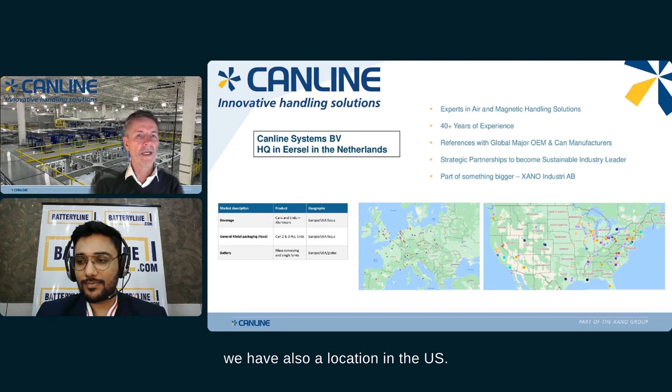Thank you, Mr. Vikram Paul, for giving me this opportunity. As you mentioned, I'm working for the company Canline, based with headquarters in the Netherlands, and we also have a location in the US. I'm responsible for project management, so I'm involved in the execution of the projects, including the installation at our customer sites worldwide. Next to the execution, I'm also involved in opportunities for the battery market. If you're looking at these slides, you see we are experts in air and magnetic handling solutions.

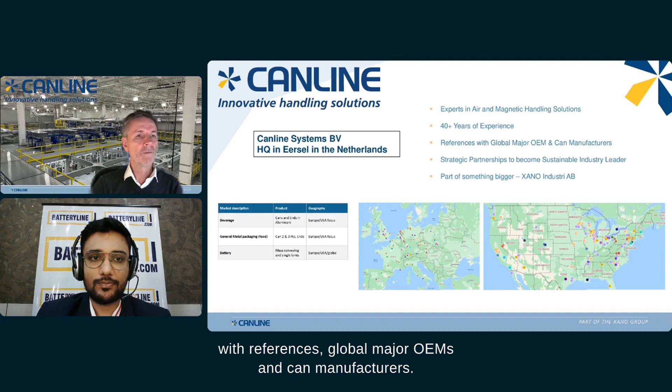We have already more than 40 years of experience with references from global major OEMs and can manufacturers. We have strategic partnerships to become a sustainable industrial leader. And it's Canline, but we are part of something bigger - we are part of the Xano group.

If you're looking at our installed base, you can see it's two areas where we are really based - we have an installed base in Europe, and we have an installed base in the US. We have installed base in other parts of the world too, but this is our main focus. So in Europe and the US, every dot represents equipment at our main customers.

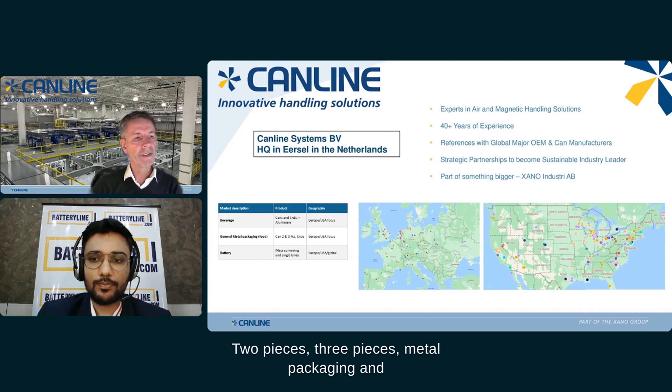And if you're looking at our product portfolio, we are aiming for the beverage market, for the can and the lids. And we are aiming for the food market - 2 pieces, 3 pieces, metal packaging. Beside that, the food and beverage, we are also looking into the battery market.

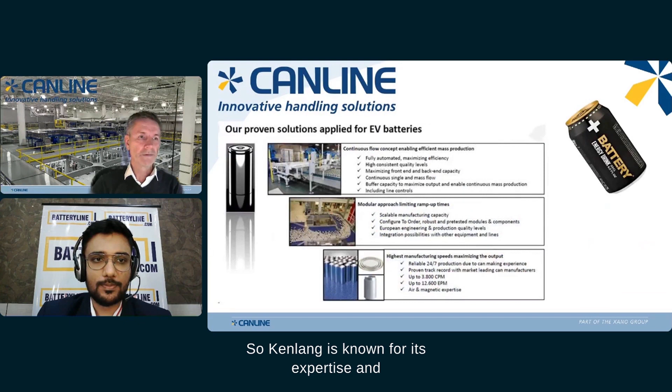So Canline is known for its expertise in handling solutions for rigid metal packaging for the food and beverage market. We have an installed base worldwide. And if you're looking at batteries, it looks a little bit different than the food and beverage markets. But if you're looking at this picture on the right side, you see a can with a logo from the battery - so with some creative ideas, you can also see a battery in the can. So it looks like a different market, but it's not. I will explain that a little bit further during this webinar.

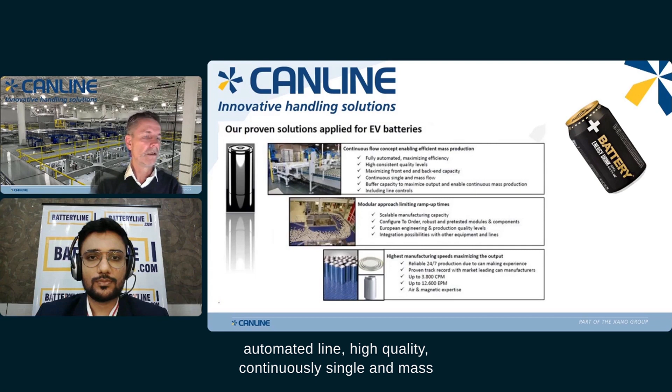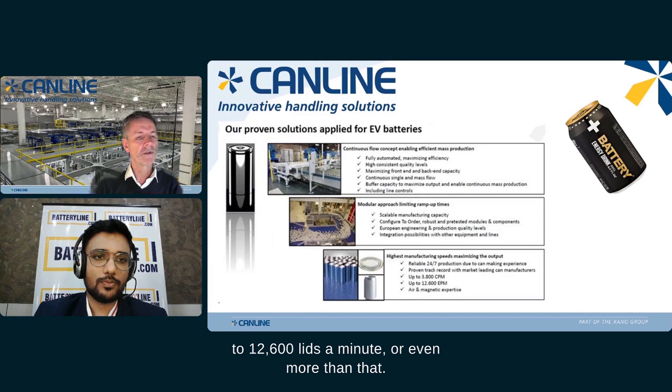Some proven applications we have already in EV batteries: fully automated lines, high quality, continuously single and mass flow, buffer capacity to maximize outputs. We have a modular approach, limiting ramp-up times. High manufacturing speeds we have, maximizing the output. If you're looking at cans, we can do up to 3,800 cans a minute. And if you're looking at the ends or the lids, up to 12,600 lids a minute or even more than that. Of course, we transport those products with our air and magnetic expertise.

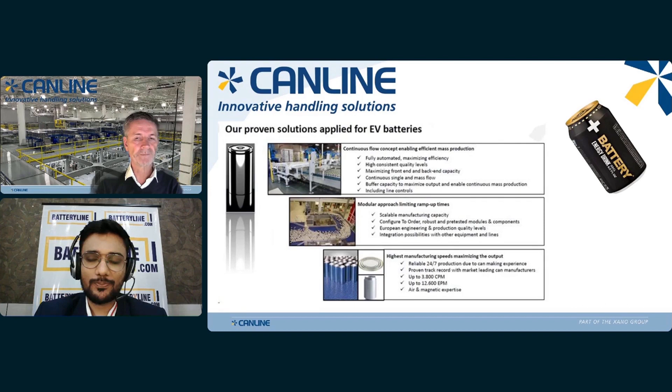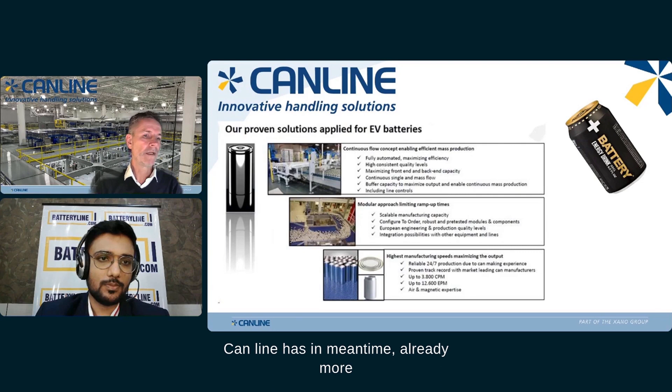So our mission from Canline is to be the world leading specialist in rigid metal packaging conveying equipment and the most sustainable partner of choice by offering superior technical solutions. We do this through handling solutions in the food, as explained, beverage, but also the battery industry. What we're doing is connecting the machines. Canline has more than 40 years of experience in belt, air and magnetic handling solutions with references at all global OEMs and can manufacturers. We are headquartered, as explained, in the Netherlands, in Eersel, and from there we supply machines worldwide, mainly focusing on the US and Europe.

Thank you very much, Rene, for the introduction of Canline. Coming to the first question of the Q&A session: what are battery cans, and how does battery can manufacturing look like from start to finish?

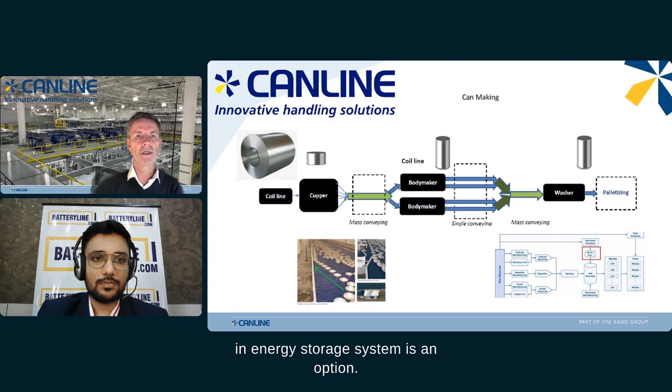Yeah, there are several battery types. Looking at the EV industry, we're looking at that of course, but also energy storage systems is an option. In general, there are three types of battery: pouch, prismatic, and cylindrical cells. These cells are combined in battery packs and used in storage and in cars.

The focus of Canline will be the cylindrical cells. Handling this is quite similar to that of cans in the food and beverage industry. So if you're looking at this slide, you can see we can use our existing technology in the area of can production for the battery.

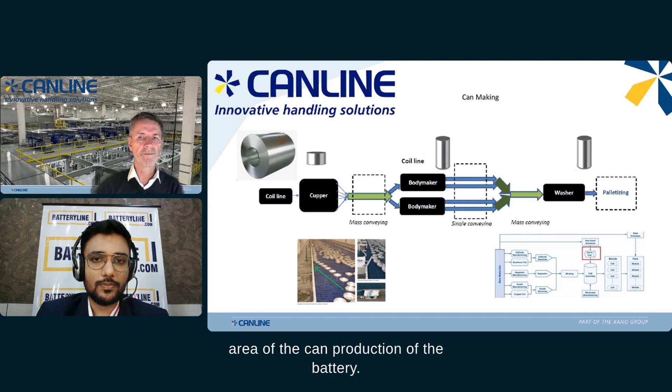Starting from a coil with the steel material, we make the cup, and then with mass flow we go to the body makers creating the can. From that part, with single conveying again to mass conveying, we go to the washer, and from there you can go to the washer or the next step in the palletizing process.

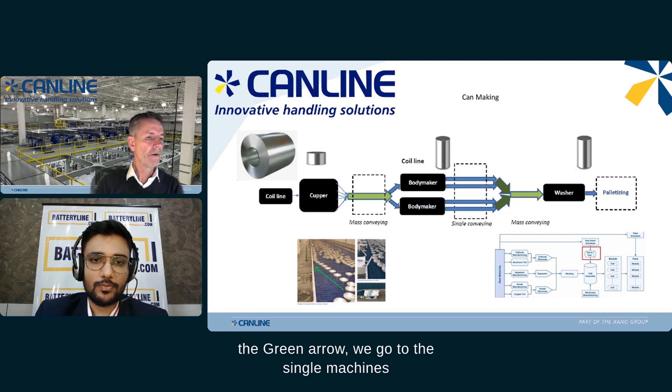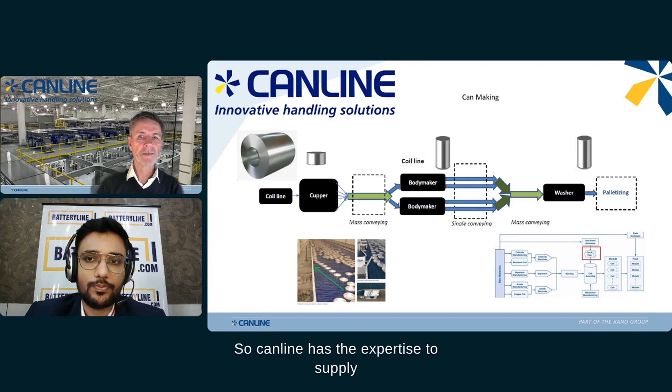Looking at the picture below on the left side, you can see the mass flow production, for example from the cup. You can see with the green arrow we go to the single machines by using our magnetism in the belt. So for mass flow, you go to single lines. Canline has the expertise to supply those conveyors between the cupper and the body maker and then towards the washer. Transport from there on will depend on the building, but can also be done with conveyors, elevators, etc.

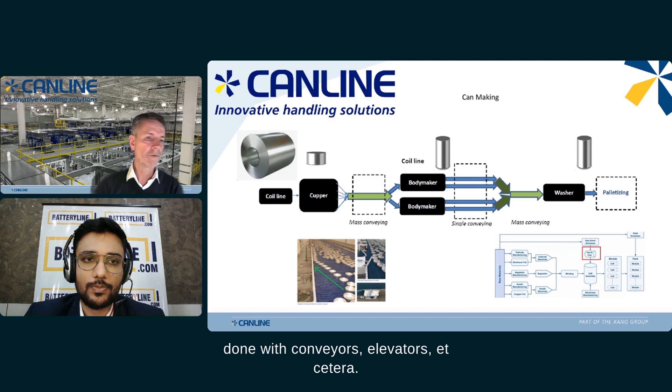So in this part of the process, we see our large 40 years of experience come into place - from coil until the can making.

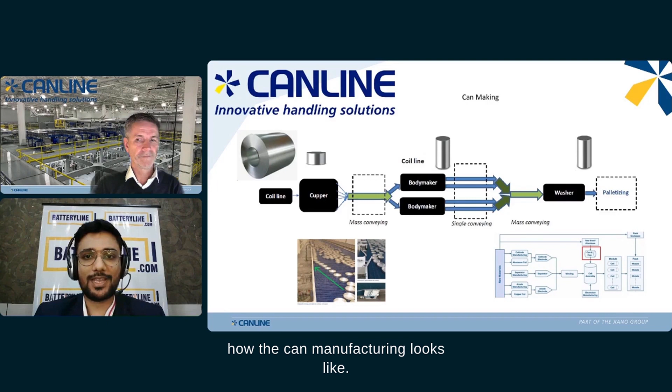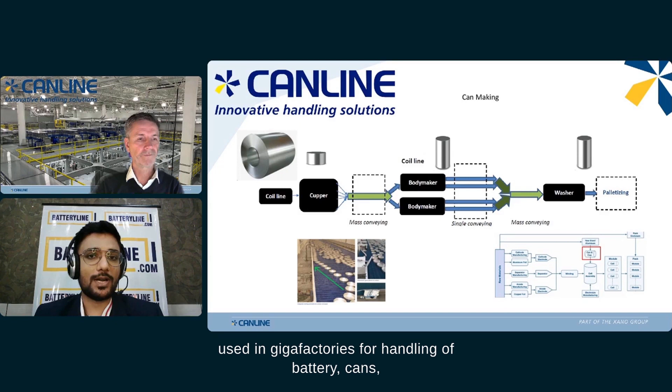Thank you very much, Rene, for explaining how the can manufacturing looks like. So coming to the second question: can you explain the different types of conveyors commonly used in Giga factories for handling of battery cans or cells, and their respective advantages and disadvantages?

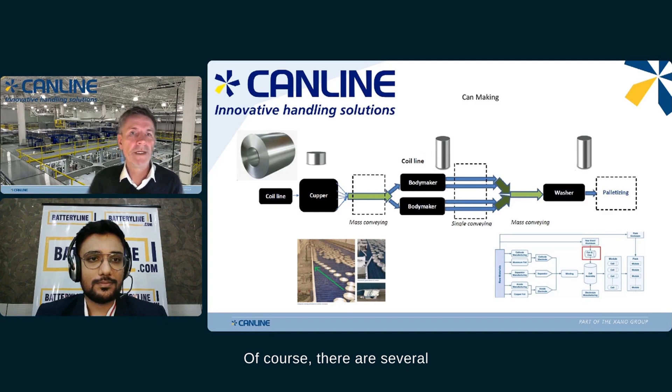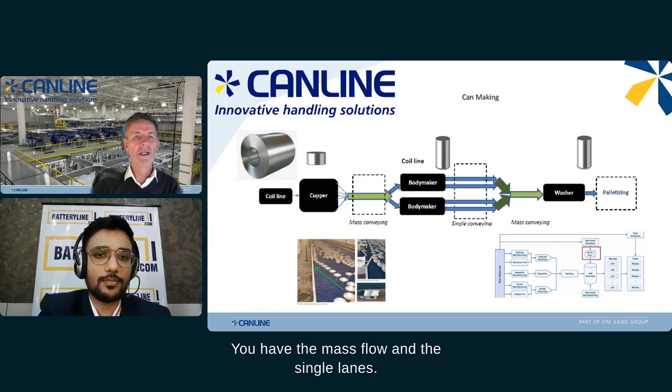Yes, I can explain a bit. There are several solutions to connect the machines. If you're looking still at this flowchart, you can see two different types of belts: the mass flow and the single lanes. In both mass flow and single lanes, we use our magnet solution, and since the cans from the battery are made of steel, we can use our expertise in magnets for that.

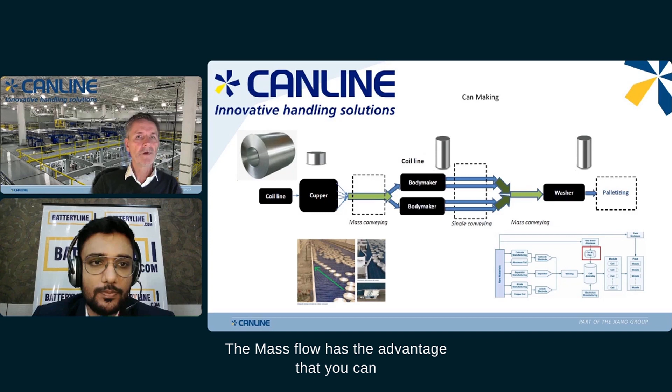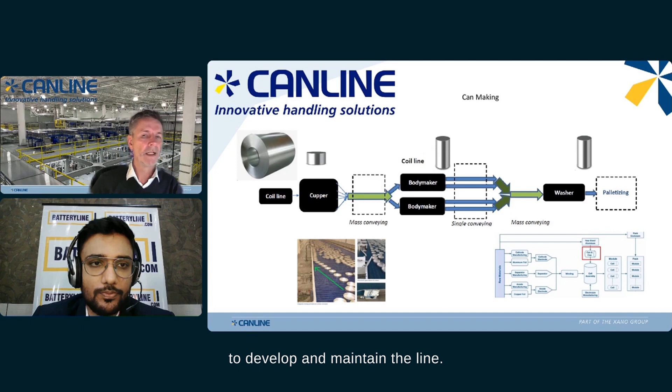The mass flow has the advantage that you can transport the cans in mass and with single lanes feed them into the machines making the battery. This makes the controls easier to develop and maintain the line. Based on our history and experience in conveying, Canline uses permanent magnets in the system.

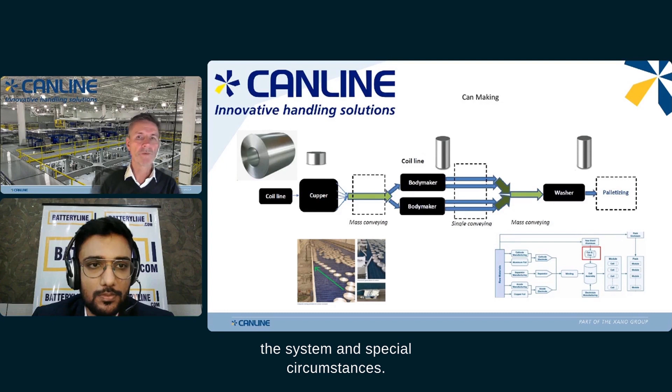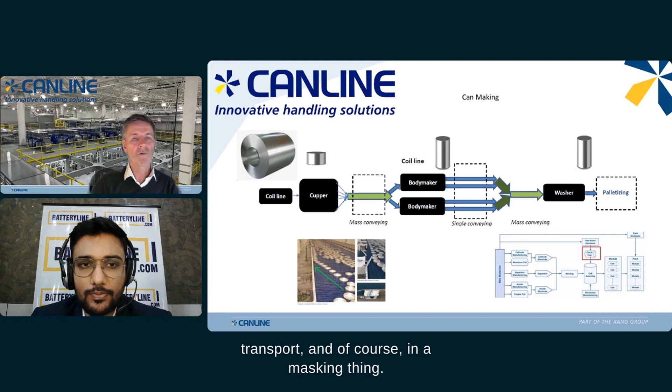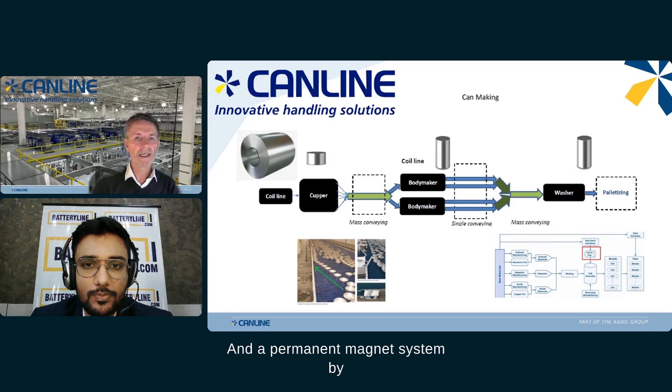In special circumstances, we can use both types of magnets, the permanent ones and electrical ones. We can use them in elevators, lowerators, overhead transport, and of course in mass conveying. It will guarantee production requirements across a wide range of products, from low to high speed. A permanent magnet system by Canline is very cost efficient because the correct magnet strength can be chosen.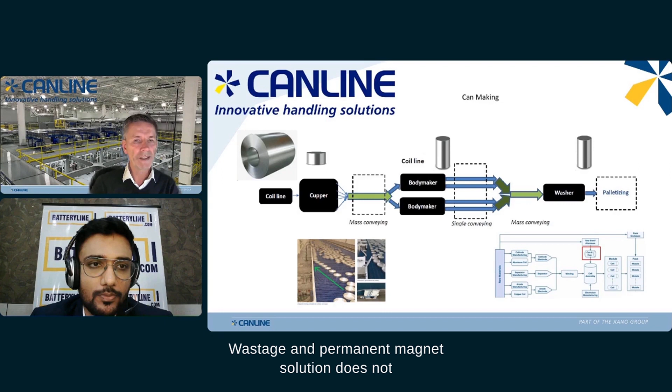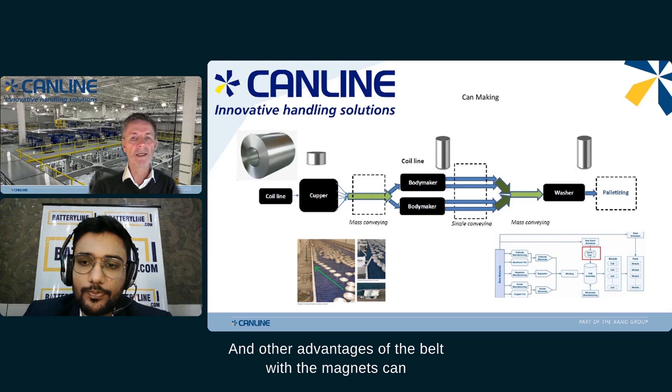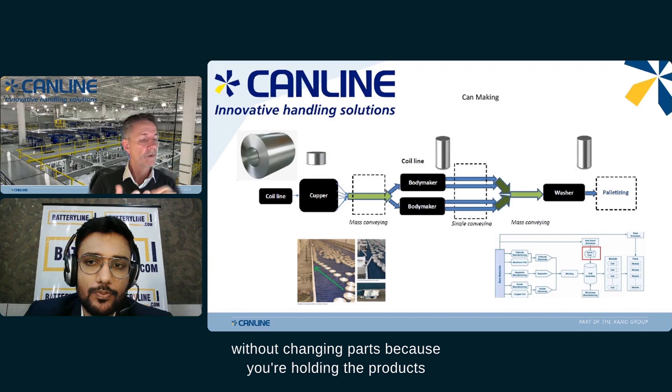It's not causing unnecessary wear or power wastage, and the permanent magnet solution does not consume electricity or need any maintenance. Other advantages of the belt with magnets are that side guides are not always needed, so you can skip that for preventing damage to the product, and changing to another format can be done without changing parts because you're holding the products with the magnets in the belt.

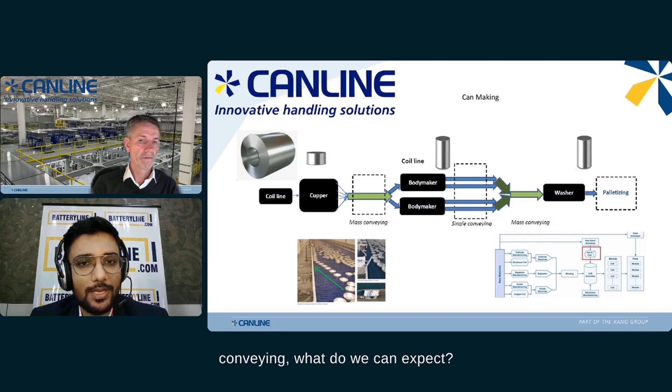Rene, when it comes to mass conveying, what can we expect? How many cans are running on the belt per minute?

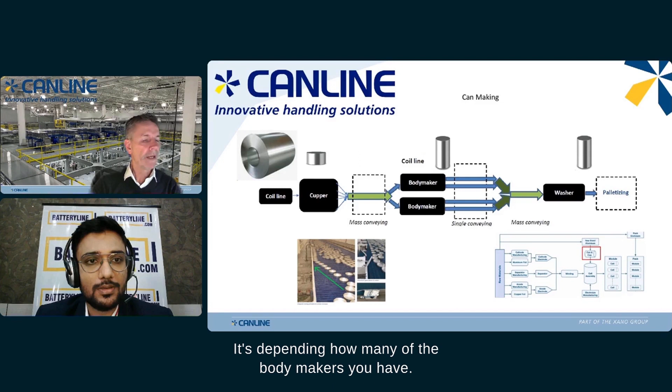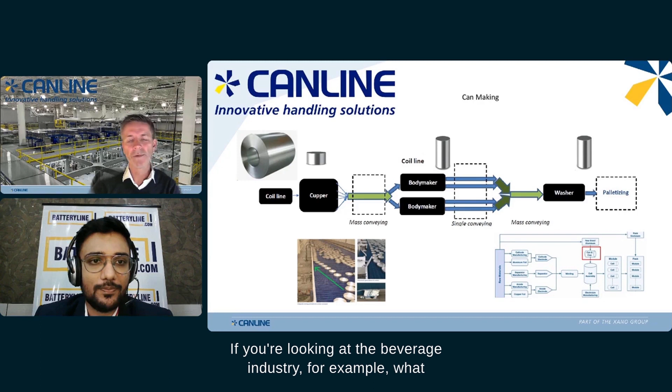It's depending on how many body makers you have, but you can imagine if in the slide you see 2 body makers, it can be up to 4, 5, 6 body makers, and each body maker can make about 200 to 250 cans a minute. So you can imagine the mass flow, what is it, 1,000 cans a minute is easily achieved. And if you're looking at the beverage industry, for example what I said before in the webinar, it could be even going up to more than 3,000 cans a minute.

Coming to the next question: what are the key challenges that battery can manufacturers face when it comes to battery can handling, and how can they overcome these challenges?

Well, the demand for batteries is growing very fast, and the factories are putting a lot of effort to keep up with this demand. Looking at the growth in the battery market, double digit growth is not strange, and you're looking to still grow until 2030 for sure.

The battery market is growing more than double digit every year. So you see factories with 100 gigawatt hour capacity, large factories making an enormous amount of batteries. Beside the challenge of material availability to produce the batteries, the handling and transport to the factories will also be a challenge. Uptime and availability of the equipment must be on a high level.

In the beverage market, more than 3,000 cans a minute are coming. If you look at the lids or the ends of the cans, it can go up to 60,000 lids a minute. So automation is part of this success, as well as balancing the capacity between the different steps in the process. Mass conveying, single lanes and accumulation conveyors are crucial to get an overall good line efficiency.

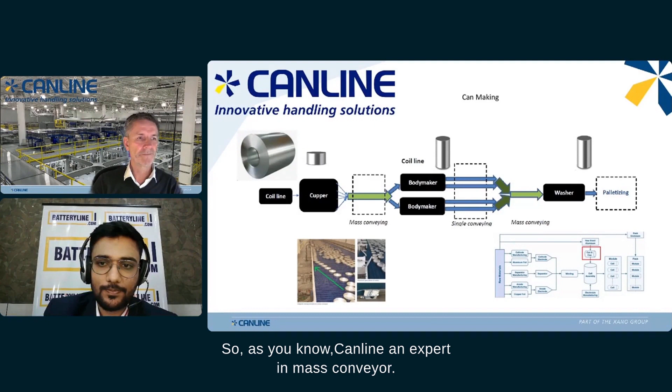I think I prepared a small slide for you, Mr. Vikram. As you know, Canline is an expert in mass conveyor, meaning a wide conveyor, maybe 1 to 3 feet or even a little bit larger, transporting cans with or without a product carrier. From the mass conveyor, we can divert into single lanes, feeding into the machines in different processes.

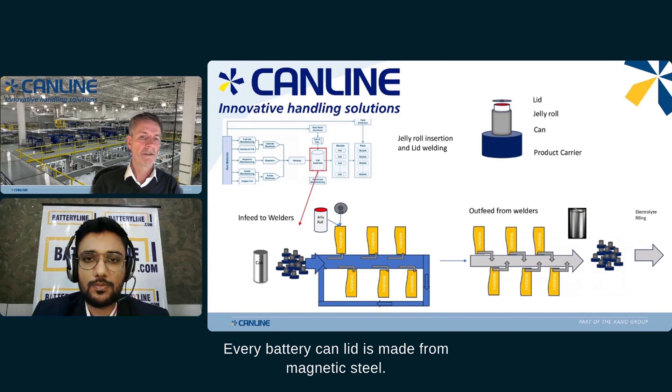Every battery can or lid is made from magnetic steel, and with magnets you can handle these easily. So using the mass flow, you can have a smaller footprint. You would do this with single lanes, all feeding to one single machine. It gives more flexibility, and it gives you more output.

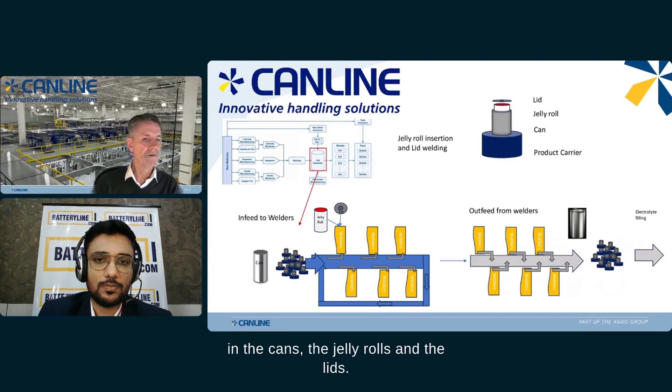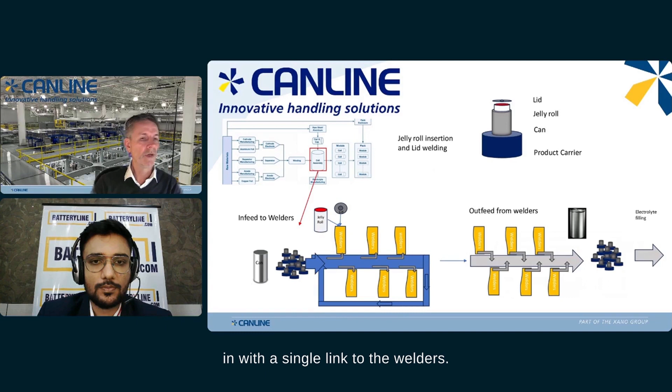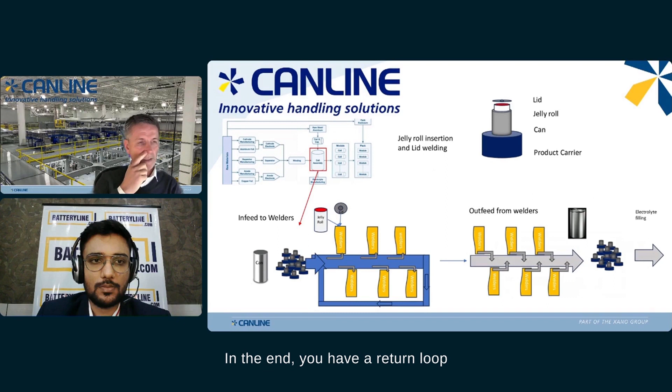In this picture, for example, if one of the welders is not running, you go to the left picture where you feed in the cans, the jelly rolls and the lids. You feed them in with the mass flow, and it will be guided to the sides, feeding in with a single lane to the welders. Mass flow going into different welders. If one of the welders for a reason is not working, it will go to the next one, and the next one. In the end, you have a return loop, feeding back the cans into the system.

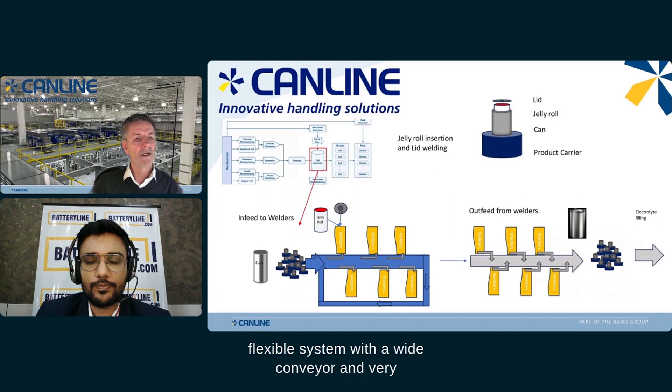So with this one, you have a very flexible system with a wide conveyor and very flexible routing for where the cans should go.

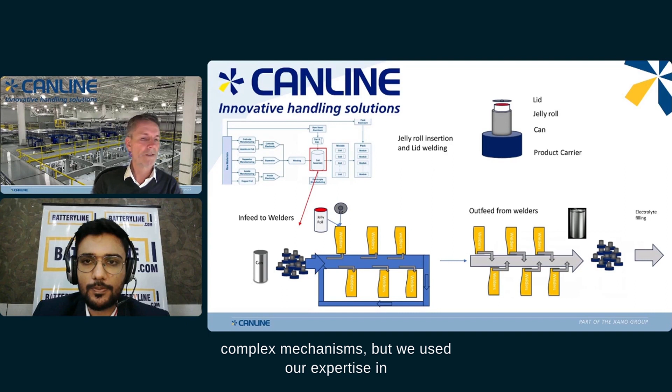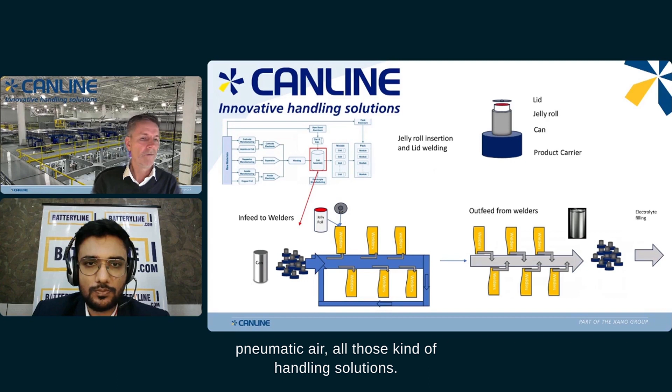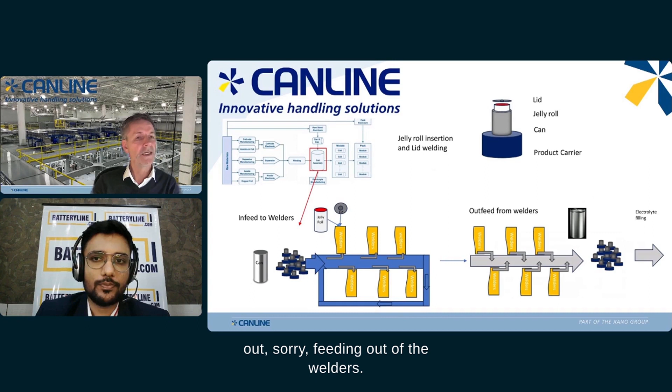So if one of the welders is not working, you can go to the next one automatically, and we don't need all kinds of difficult, complex mechanisms. We use our expertise in magnets for this mass conveying, with a limited amount of sensors, limited amount of pneumatic air, and those kinds of handling solutions. That's really our strength in this kind of concept. The feeding out of the magnets, feeding out of the welders, is fed back into the system, also on mass flow, going to the next step, the electrolyte filling.

Thank you, Rene, for explaining where Canline today provides its conveying solutions in cell manufacturing. But we would like to know more about product carriers and why there is a need for product carriers in battery cell manufacturing and conveying lines. Can you please explain more about that?

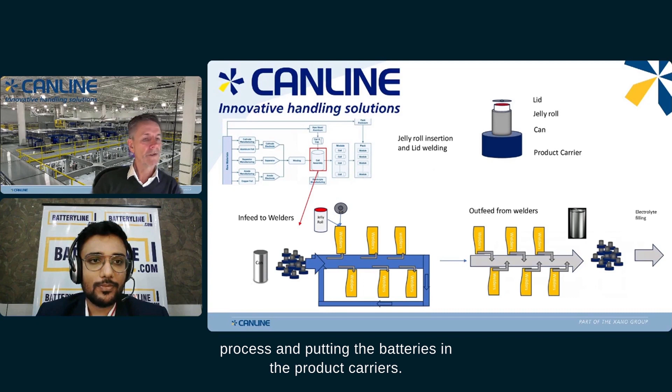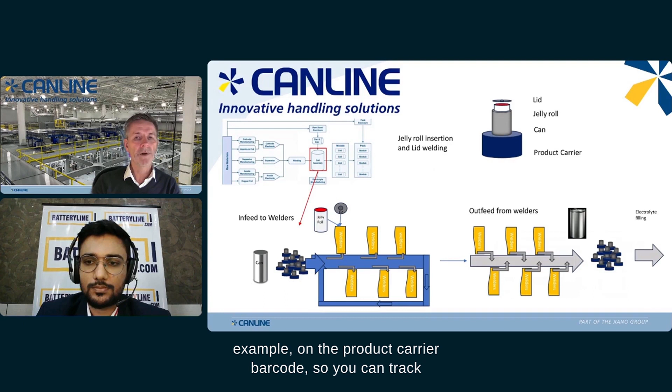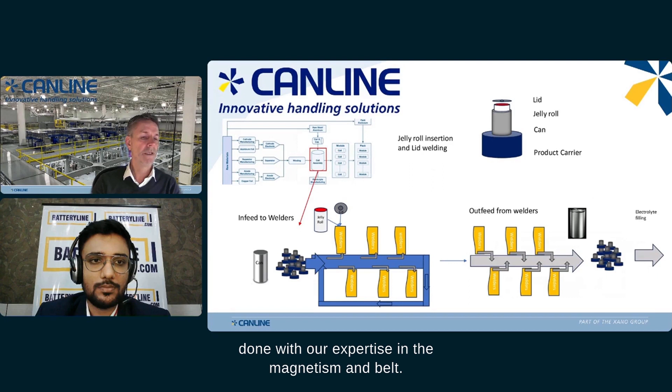Each machine, of course, has a different step in the process. Putting the batteries in the product carriers lets you transport them easily from one machine to the other with the same interface, so the interface in the machines can all be more or less the same. Also for track and tracing, you can put a barcode on the product carrier so you can track it through the whole process. The carriers are made from plastic and steel, so the handling can also be done with our expertise in magnetism and belts. The concept is the same.

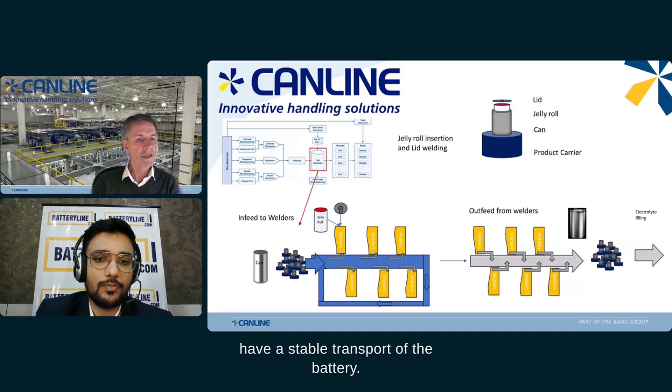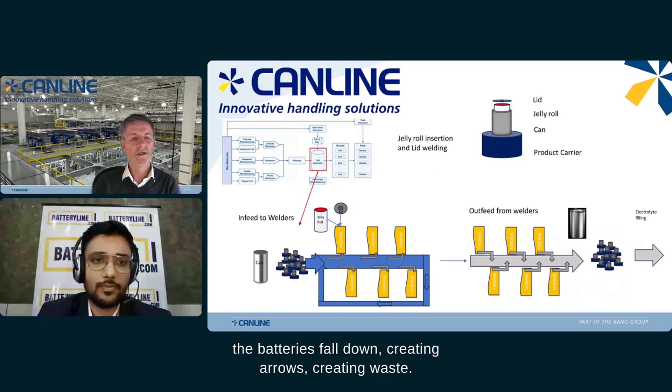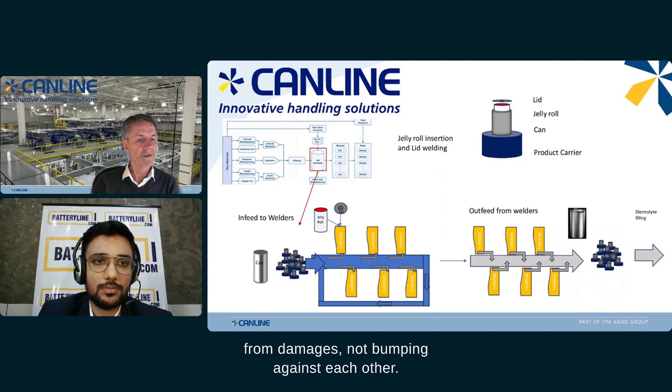Besides that, if you put the jelly roll or the lid into the battery, you want a stable transport of the battery, and you use the product carriers for that too. You don't want batteries falling down anywhere in the system, creating errors and waste. So the product carriers make the transport stable, have a good interface with the machine, and also protect the battery from damage by not letting them bump against each other. It keeps them separated.

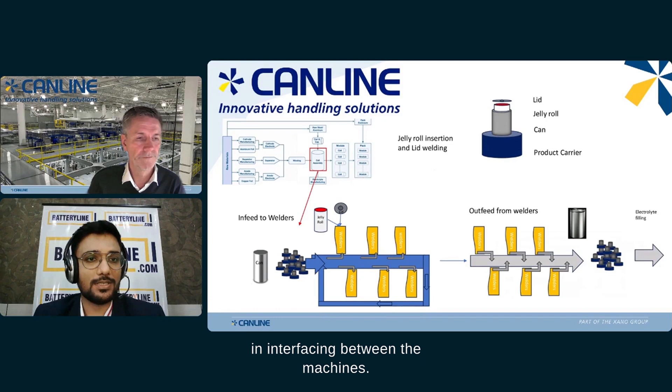Rene, you said that it helps in interfacing between the machines. Can you explain what is the meaning of interface?

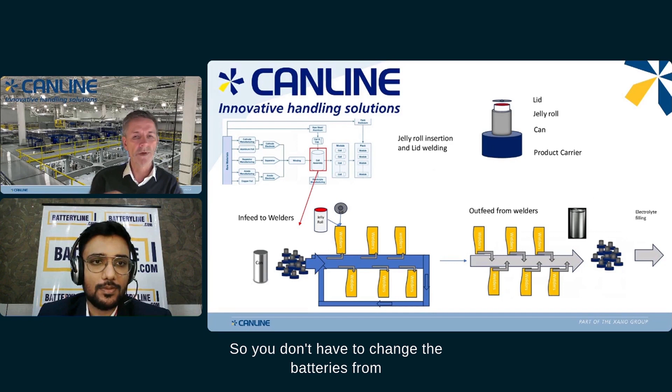Well, it's about how to handle the product carrier. You have to feed it into a machine, you have to grab it, for example, to move it to the next step in the process. So the interface always looks the same - it's always the same kind of product carrier, so you don't have to change the batteries from one product carrier to another type. That makes it simpler. If you can hold the product carrier as long as possible, you have the same interface with the machine throughout.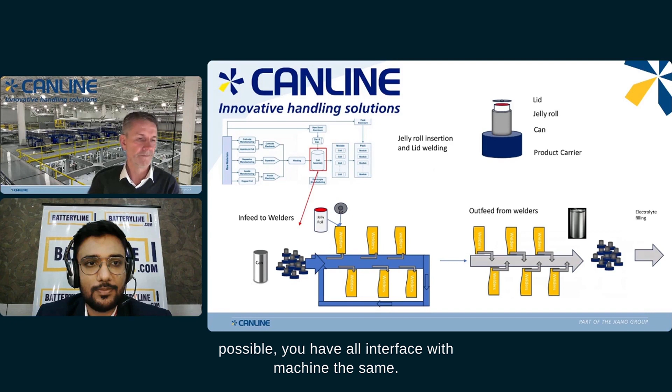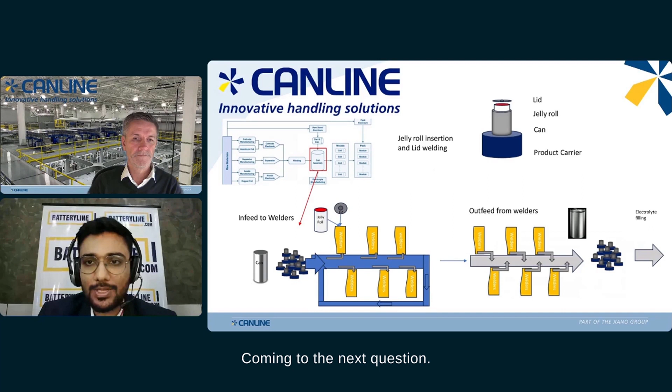Thank you, Rene, for explaining in detail how the product carrier helps in conveying of cells. Coming to the next question, how does predictive maintenance and data analytics play a role in ensuring the reliability and uptime of battery cell or can conveying equipment in a Giga Factory?

As I mentioned before, uptime is very important in Giga Factories. So we are developing that part, and we have great ideas and opportunities for this, for all production lines, but specifically also for battery lines. We don't want to produce any waste and don't want any downtime - downtime and waste cost a fortune. And yes, dashboards we already have, so you can see how the line is running now or in the past.

We are developing a system, let's call it CAS AI, artificial intelligence, to predict what's going to happen and what can be done to prevent unplanned downtime. Of course, for that, data needs to be available, but it's also a learning process. The first step is to collect the data and make it visible on a dashboard. The next step is to find the correlation between the data and determine root causes of faults, making sure it won't happen again.

The ultimate step is to predict what's most likely going to happen, to be one step ahead. This will all support the maximum efficiency of the line, the OEE, including a constant aligning between data collection and operability, and of course the ultimate goal of a self-supporting system in the future.

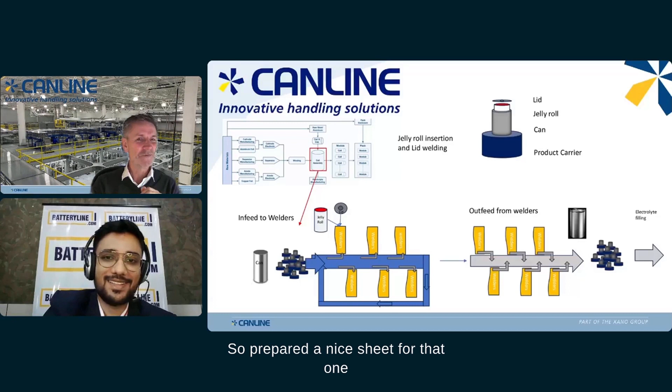So, being the Dutch guy, I compare it with the Dutch Formula 1 driver Max Verstappen. I've prepared a nice sheet to explain it a little bit further.

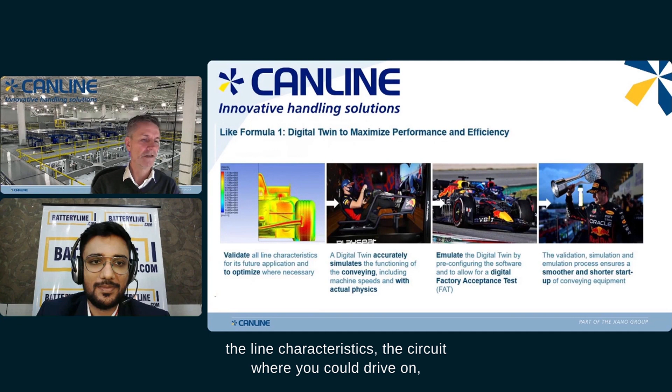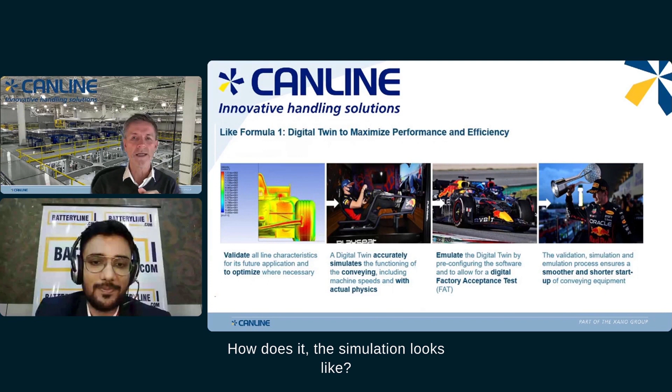If you look at the four pictures, this is what I explained about what you can do with the line to be installed at the customer. First, you validate the line characteristics, the circuit where you could drive on, how the temperature and everything looks. Then you simulate things, see how it looks in the simulation, and try to optimize the data and the settings.

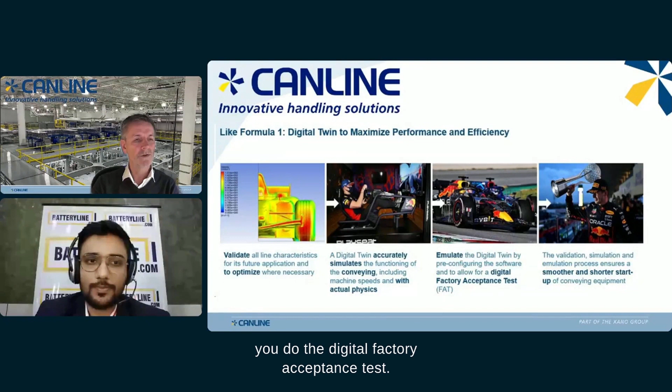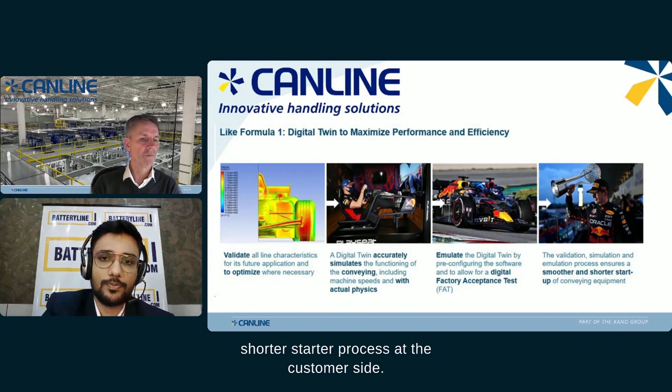Then you emulate the digital twin by pre-configuring the software to allow for a digital factory acceptance test. So you do simulation, emulation, and then the digital factory acceptance test. In the end, with the validation and simulation done, you ensure a much smoother and shorter startup process at the customer side. You can imagine with these four pictures that we can do that for a line to be installed at the customer.

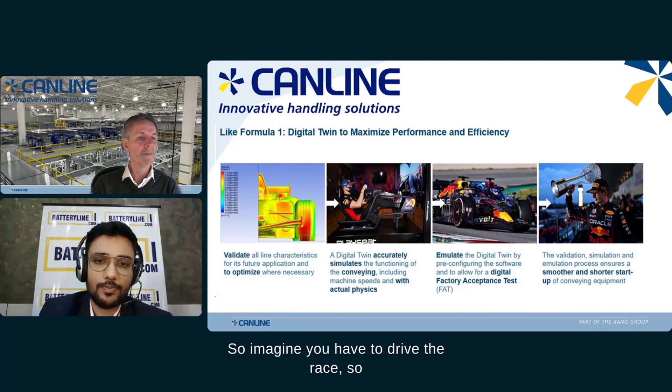Imagine you have to drive the race, so you have to start up the line without doing any simulation or data collection beforehand. You can imagine it costs a lot of time, and therefore you create a lot of waste and sometimes frustration about why it doesn't work. So we try to do a lot of things up front.

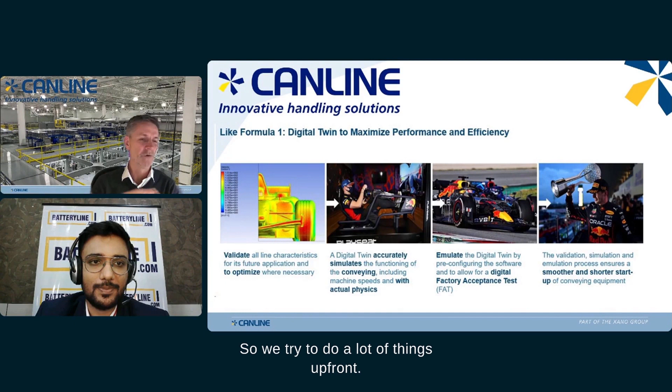Yeah, it's very real that the digital twin is very important for making lines run before installation. Thank you very much for explaining that in detail.

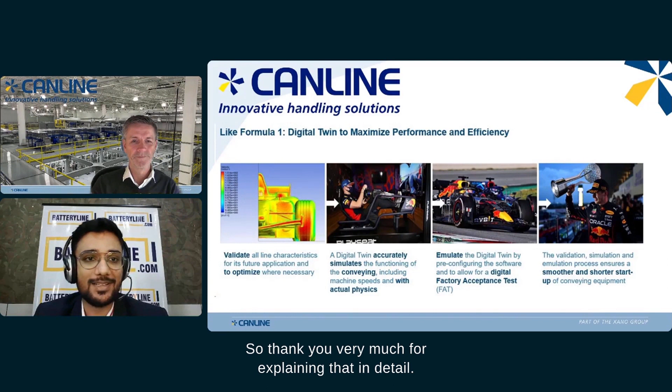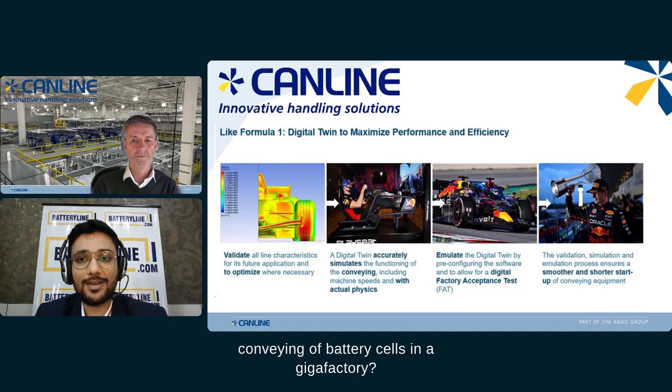Coming to the last question of this webinar: what is the biggest challenge while conveying battery cells in a Gigafactory, and how can we solve these challenges?

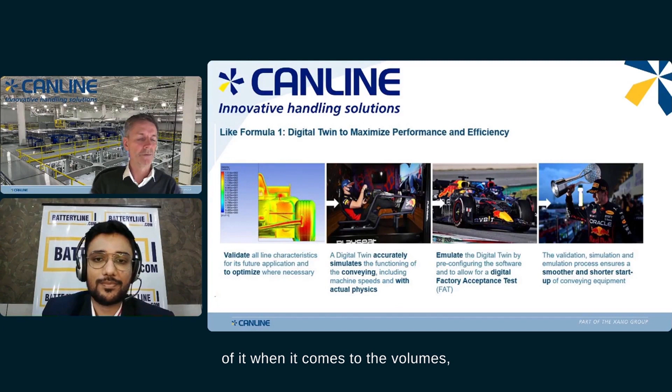The biggest challenge, of course, materials will be a big part of it when it comes to volumes, because it will increase further and further. It will be about scaling up traceability and quality, from beginning till end it's a complex process. Also the batteries themselves are still developing—beside the machines, batteries are also evolving, developing new types and new features, like more storage capacity and faster charging. So in our business, we have to provide the right solutions to handle the increased capacity needed in a flexible way, on a small footprint, to produce these batteries more economically.

We have come to the end of this webinar. In conclusion, we have gone through the challenges faced by can and cell manufacturers while handling and conveying. We have gone through the process of how can or cell housing manufacturing looks like. We have discussed the importance of predictive maintenance and data analytics for can and cell conveying equipment. In cell manufacturing, we discussed how cells are handled in the cell assembly area on the product carriers, and also the importance of product carriers while conveying cells.